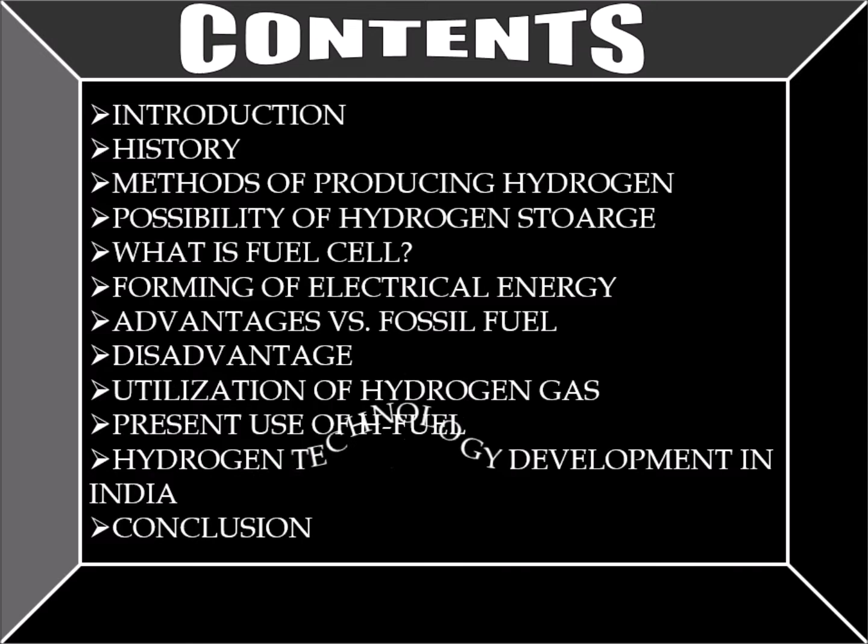Gaseous hydrogen is 14 times lighter than air, colorless, odorless, tasteless and reactive gaseous element. The most attractive feature of hydrogen as an energy carrier is that it can be produced from water, which is abundantly available in nature. Hydrogen has the highest energy content per unit of mass of any chemical fuel.

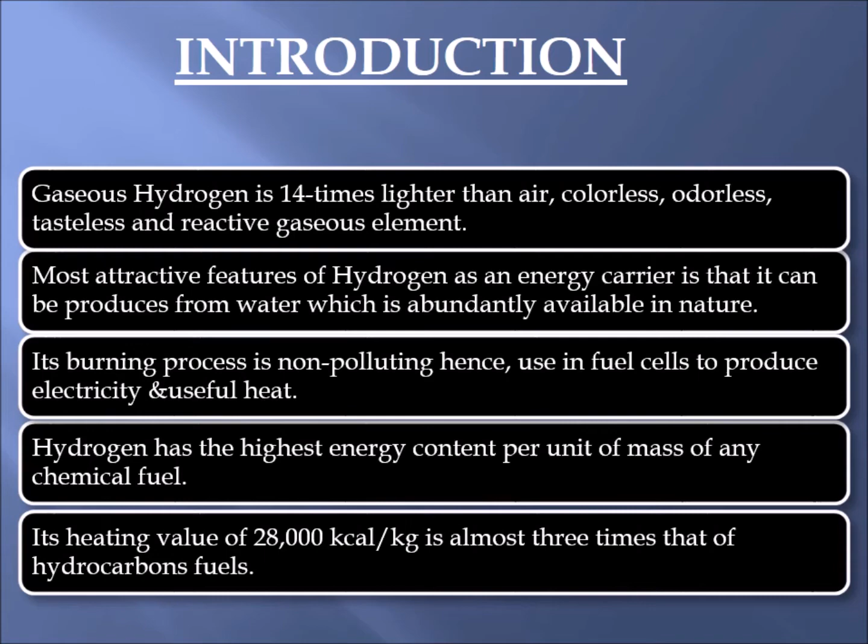Its burning process is non-polluting, hence it is used in fuel cells to produce electricity and useful heat. Its heating value of 28,000 kilocalories/kg is almost 3 times that of hydrocarbon fuels.

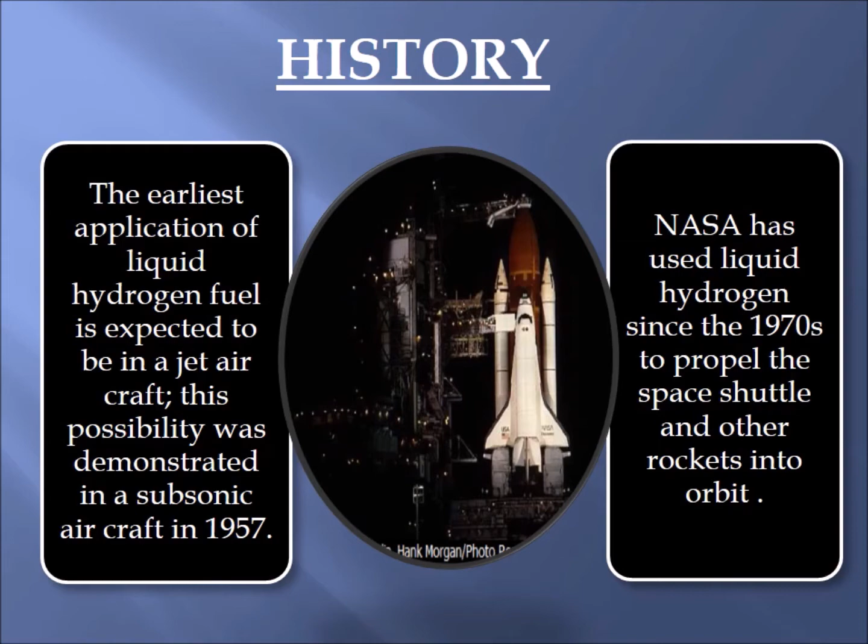History: NASA has used liquid hydrogen since the 1970s to propel the Space Shuttle and other rockets into orbit. The earliest application of liquid hydrogen fuel is expected to be in a jet aircraft. This possibility was demonstrated in a subsonic aircraft in 1957.

Methods of producing hydrogen. Hydrogen is a secondary fuel that is produced by utilizing energy from a primary source to break the chemical bonds to release hydrogen. 1. Electrical energy, 2. Heat energy, 3. Fossil fuels, 4. Solar energy.

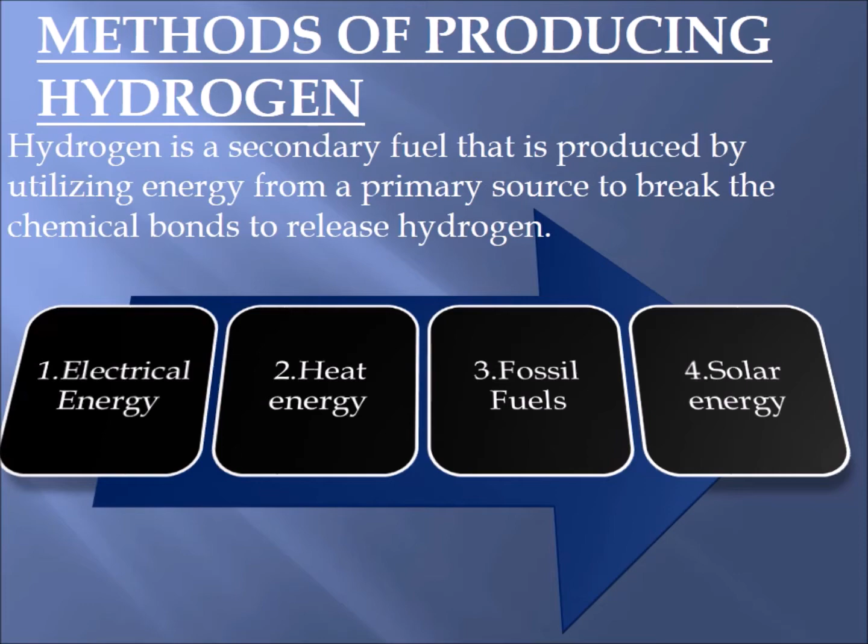Electrolytic hydrogen production. The process of splitting water into hydrogen and oxygen by means of a direct electric current is known as electrolysis. Principle: an electrolysis cell consists of 2 electrodes, metal or carbon plates, immersed in an electrolyte solution. A DC voltage is connected to the electrodes so that an electric current flows through the electrolyte solution.

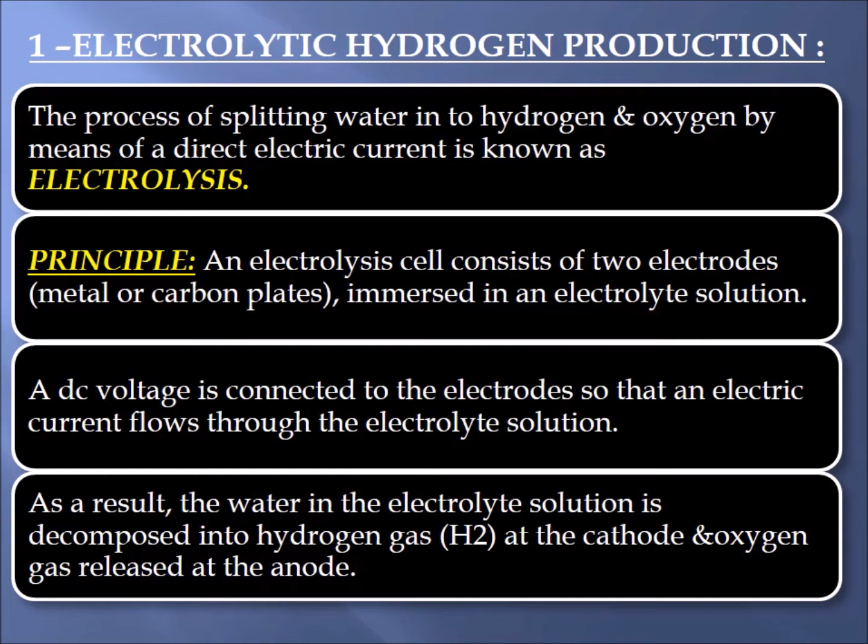As a result, the water in the electrolyte solution is decomposed into hydrogen gas, H2, at the cathode and oxygen gas released at the anode. Simple electrolytic cell. Ideally, a voltage of 1.23 volts should be sufficient for the electrolysis of water at normal temperature and pressure.

Second, thermochemical methods. A higher conversion efficiency might be possible if the heat produced by the primary fuel could be used directly to decompose water. Such direct decomposition into hydrogen and oxygen is possible, but it requires a temperature of at least 2500 degrees Celsius. Because of the temperature limitations, direct single-step water decomposition cannot be achieved.

However, a sequential chemical reaction series can be devised in which hydrogen and oxygen are produced. In this operation, energy is supplied as heat at one or more chemical stages and water is consumed and all other chemical intermediates are recycled.

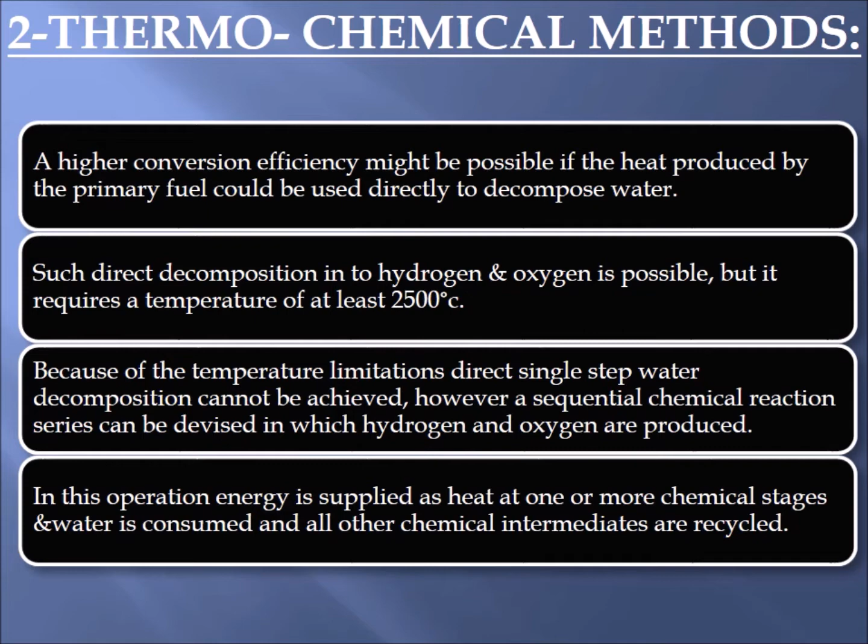Third, fossil fuel methods. A gaseous mixture of carbon monoxide, CO, and hydrogen is formed in the first stage in the production of hydrogen by using a fossil fuel, that is natural gas, petroleum product, or coal. To remove the carbon monoxide, the mixture is submitted to the water-gas shift reaction with steam. The carbon monoxide is thereby converted into carbon dioxide with the formation of additional hydrogen. The carbon dioxide is an acid gas that can be absorbed in an alkaline medium.

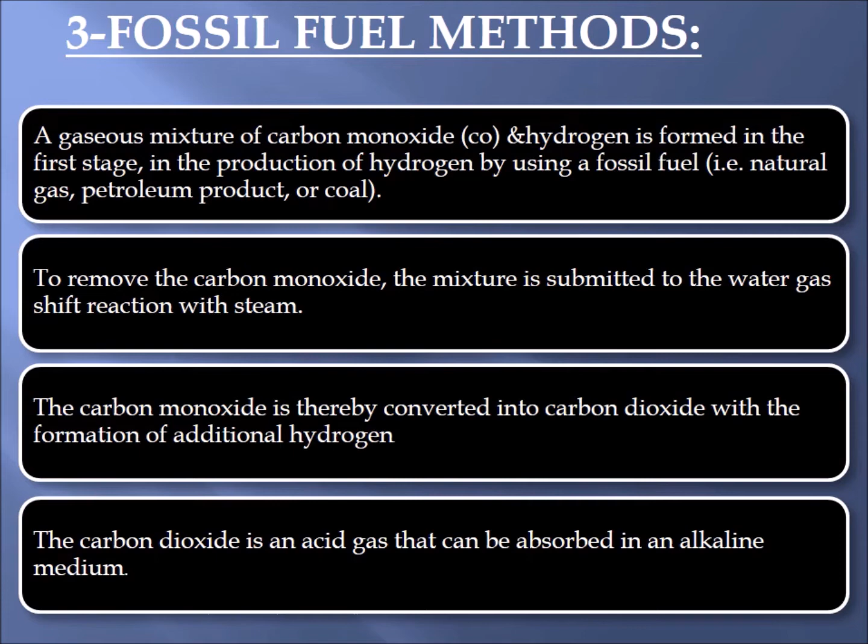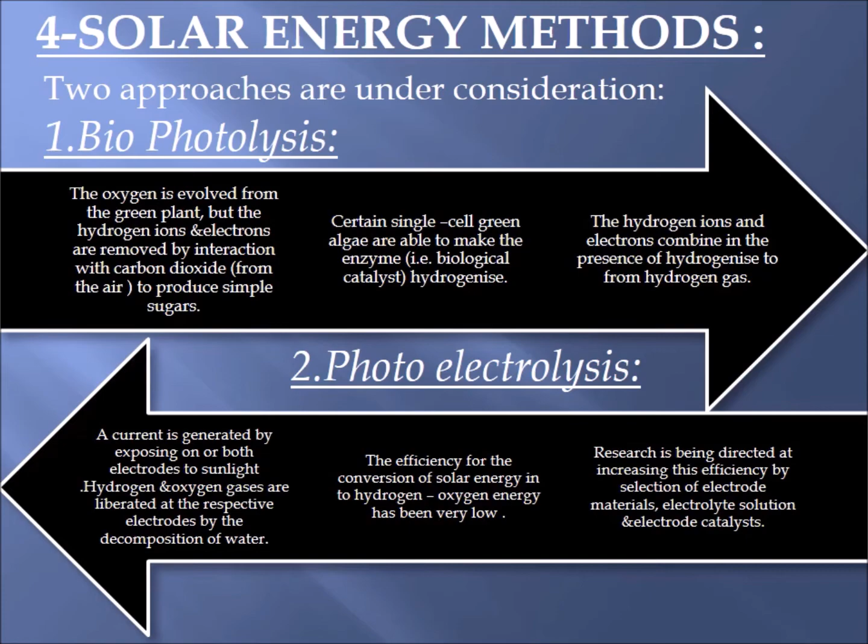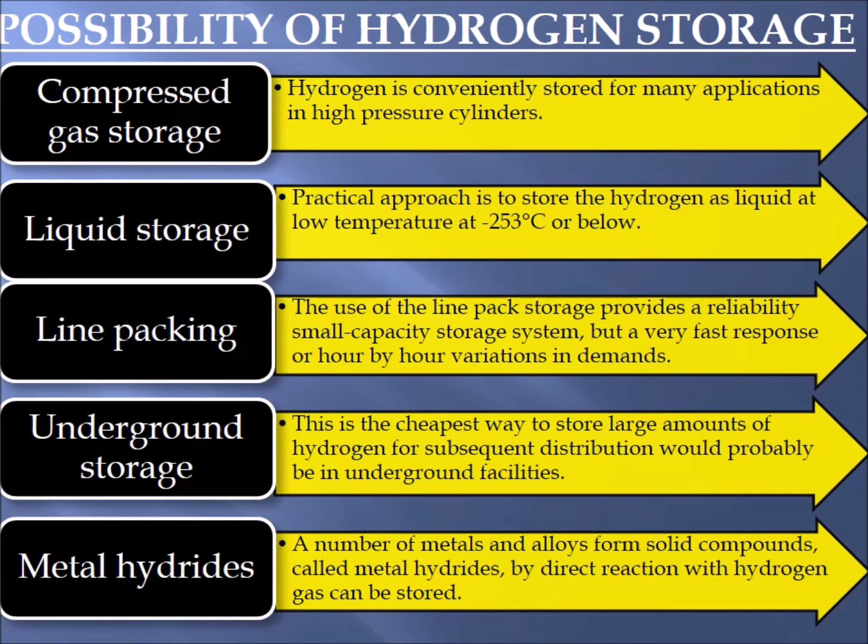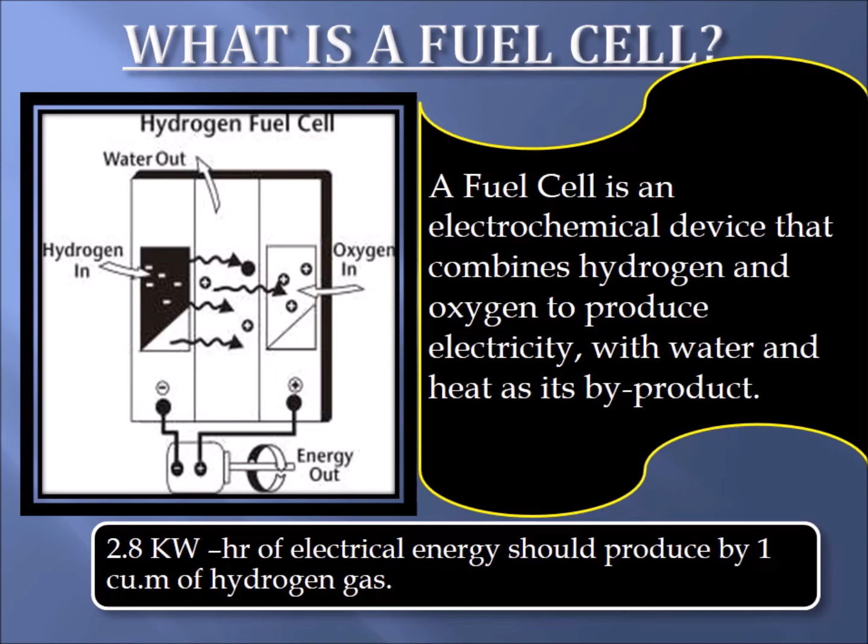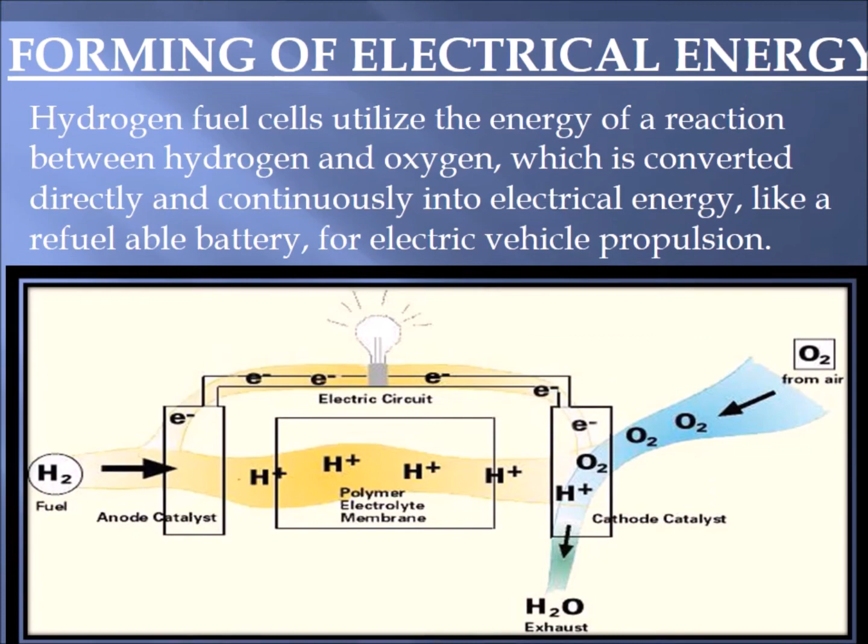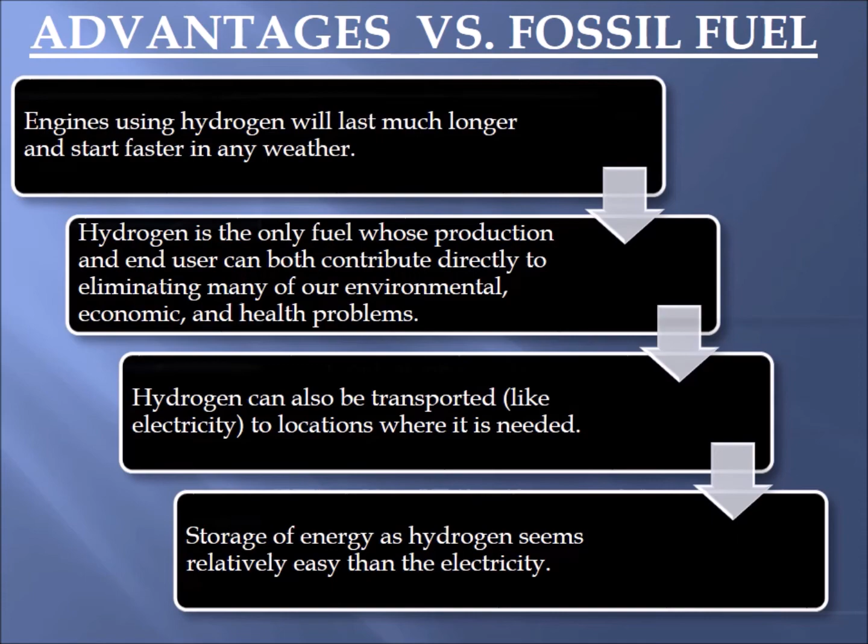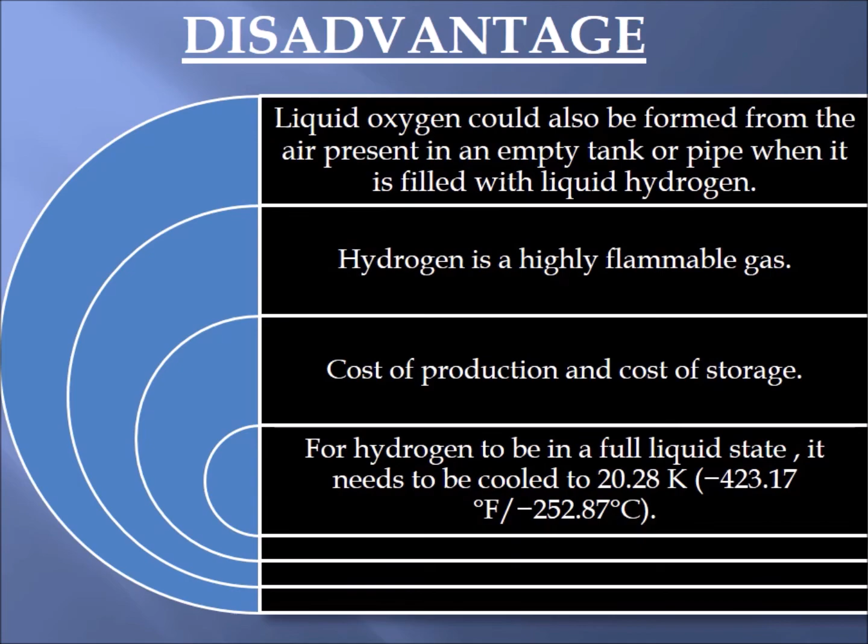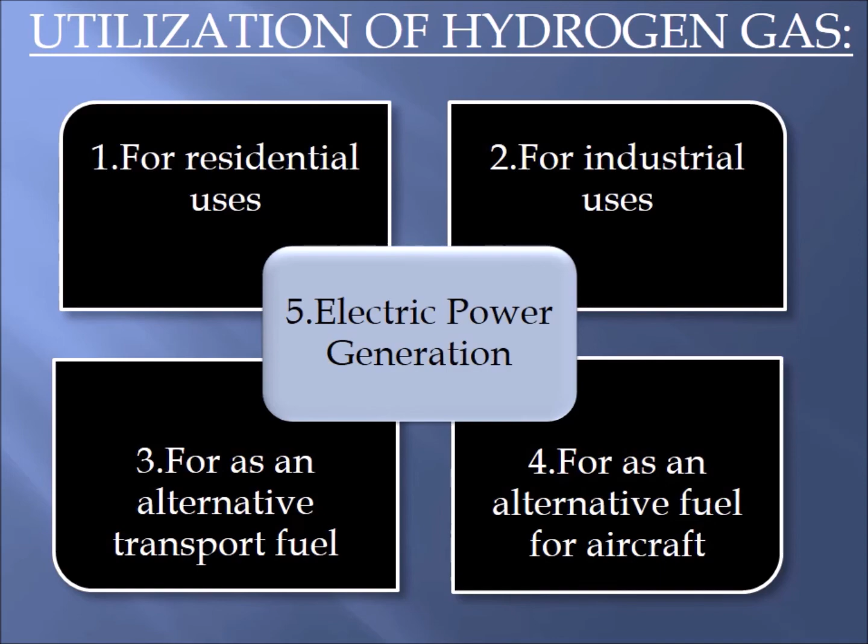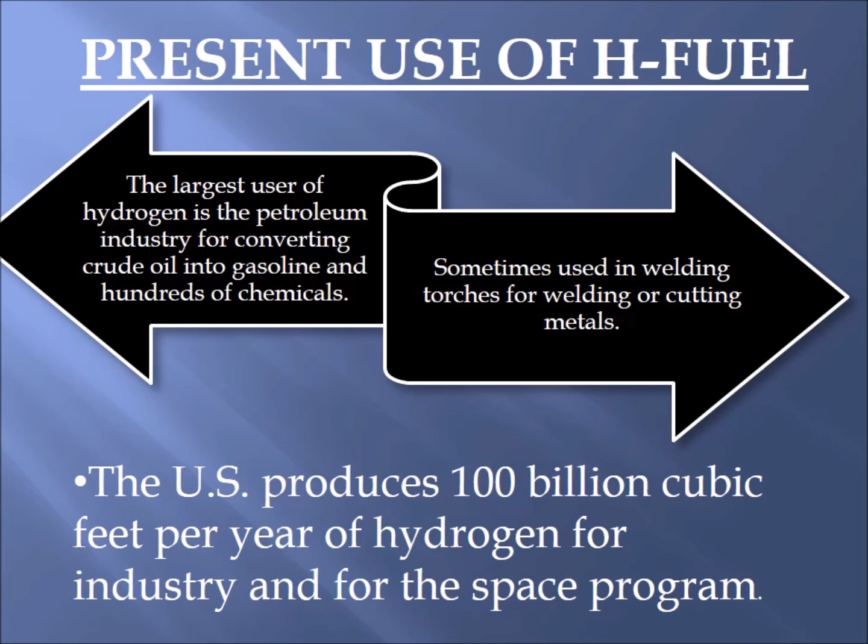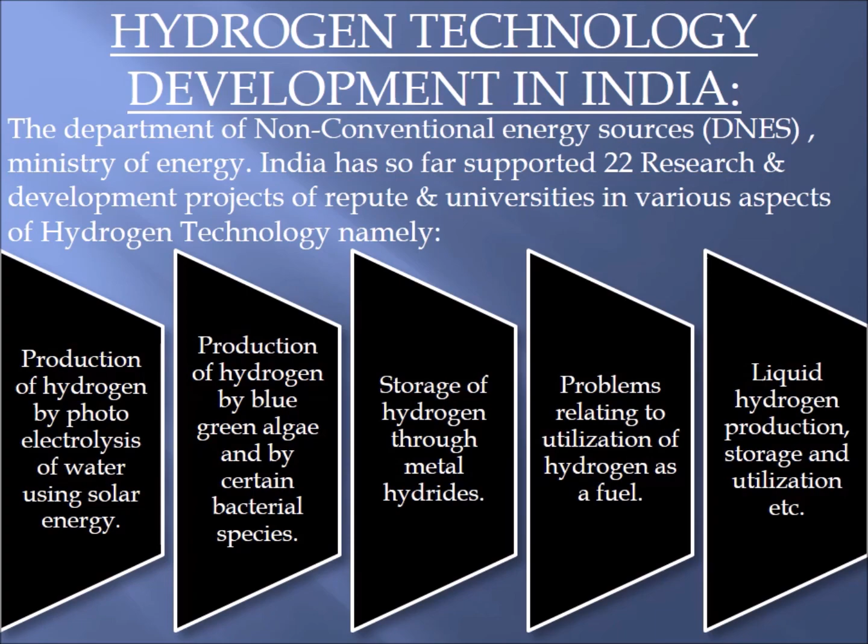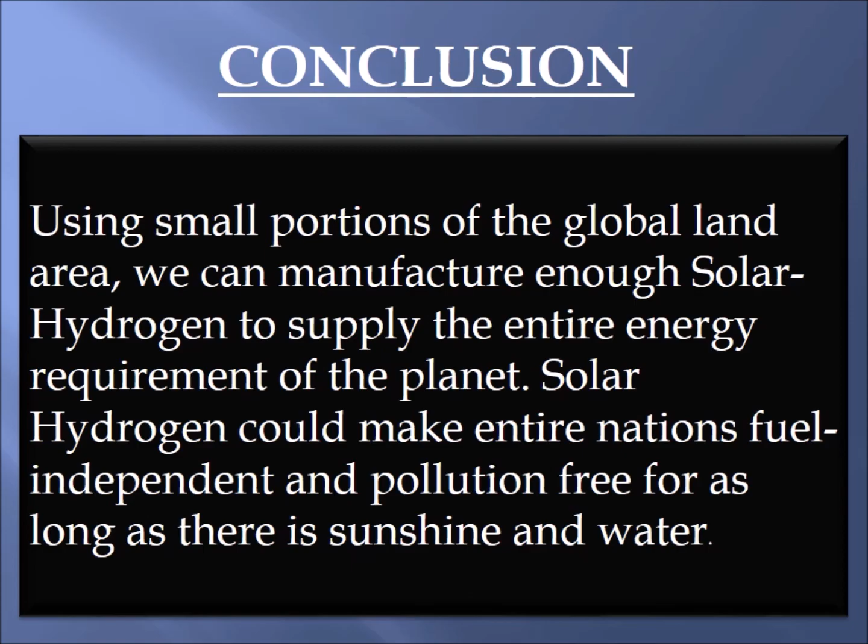Conclusion: using a small portion of the global land area, we can manufacture enough solar hydrogen to supply the entire energy requirement of the planet. Solar hydrogen could make entire nations fuel independent and pollution free for as long as there is sunshine and water.